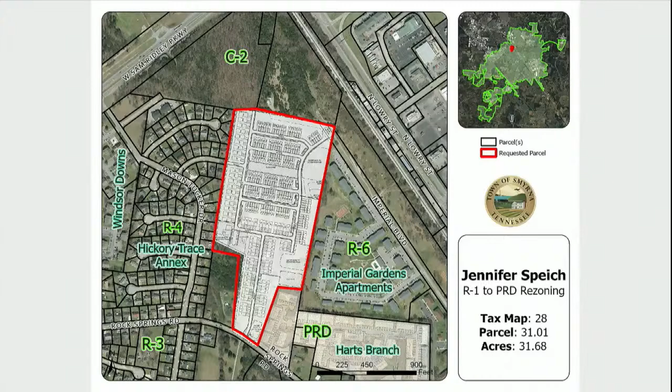Mr. Chairman, currently we're not planning on widening Rock Springs Road, mainly because Rock Springs Road runs into Front Street. So it's almost a traffic calming effect by not having the left turn lane, that will slow traffic on Rock Springs Road. It's kind of like the newest thing, keeping the roadway stacked, a road diet type thing, keeping it smaller. That way you do reduce the traffic speeds through there, because we've heard from other commission members about the speed on Rock Springs Road.

So leaving it 2-lane would help curtail speed on Rock Springs. Would that be your recommendation? My recommendation would be leave it 2-lane as is, since you're running into Front Street. Otherwise you're gonna have a higher speed volume of traffic running up into Rock Springs, into Front Street. Even with the growth taking place in that little area, you'd still recommend leaving it, not putting a turn lane in? Yes, sir.

Okay, anything else for Charles? I disagree. I think we're just buying ourselves mobility problems, and there are ways to control the speed of traffic. But to not have a series of left-hand turn lanes is just going to result in gridlock. It's a very busy street now, and this is going to add a significant number of cars to it. We're taking the recommendation of our engineer, of course, and I disagree. And like I said, we would not want to put any type of speed humps or anything along Rock Springs Road, because it is a major thoroughfare collector through there, or up Mason Tucker, just for emergency services personnel.

Okay, anything else for Charles? No. All right, thank you.

Number 8, there's some significant topographical changes on this property, so we would most likely have several critical lots. We would identify those at the preliminary plat stage if this is approved. That was really an informational comment more than anything for the developer.

We did ask for a traffic study. That has not been submitted at this time, but they are aware they have to do that, and any improvements recommended by that study would be required to be constructed by the developer.

Number 10, as it says 145 lots, we will have to have 2 entrances. They are proposing, per their phasing plan, to connect to that future section of Gwynne Farms as part of phase 1. As long as that happens, as well as the access to Cooks Lane, that would satisfy that requirement—before the 100th home is built in the development.

Sewer will not be available until it's extended through the adjacent Gwynne Farms development, so that's another factor in that road connection being built.

Number 12, they had some front setbacks on corner lots shown incorrectly. They've got it shown correctly now on their lot layout. I think there's some verbiage in there that still shows less, so they'll need to make that consistent.

It seems like it would benefit both sides because it would allow the section of Gwynne Farms to access Cooks Lane—another way in and out, which is why that stuff was there in the first place. It's changing the locations, but it was there to provide access to another way in and out besides Rock Springs Road and Lee Road. Gwynne Farms is a fairly large development, so yes, it takes some pressure off of both of those roads.

Gwynne Farms does have turn lanes, as I recall. On the Rock Springs Road side, yes, sir—they're actually constructing those already. I can't recall what was required on Lee. And there may have to be something done within Cook's Lane, because that's a hill. The traffic study is still to be submitted, but with the hill and the curve, that's certainly something we'll have to look at closely to take care of that curve there.

So the traffic study will contemplate the connection to Gwynne Farms? We'll have to include that, and certainly you've got a couple other stub streets. At this time, Gwynne Farms would be the only one that actually would be active, at least as far as we know. The traffic study concern is primarily going to be the access to Cook's Lane and what needs to be done there for safe access points and sight distance.

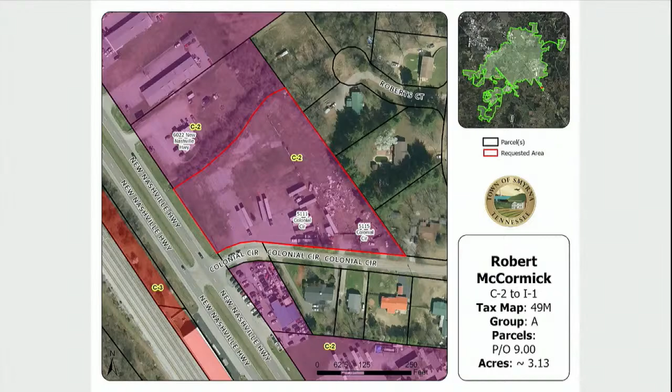I don't know what the answer to that is. I know codes have been out to visit him, so I don't know if that could be an issue they're dealing with as well. So if codes have been out to visit them, they know this use is not permitted, I'm sure. Yes, and that's why they've asked for the rezoning. So the motivation behind the request is to keep putting this stuff on the property. Yes.

When it's not permitted to be there as it is today. Correct. Make a motion to deny.

I have a motion to deny from Mark. Do I have a second? Second. Motion and a second. Further discussion.

All those in favor of denying this rezoning request signify by saying aye. Aye. Opposed? This rezoning request is denied.

Okay, we are now on to preliminary plats. Our first item is Gwynne Farms Phase 3, Robert Gwynne Drive, owner, developer, Lennar Homes of Tennessee LLC.

This is Phase 3 of Gwynne Farms. It's about 15.57 acres within this phase, 63 lots. This is kind of just the next phase of the overall development and is consistent with what was on their overall master plan.

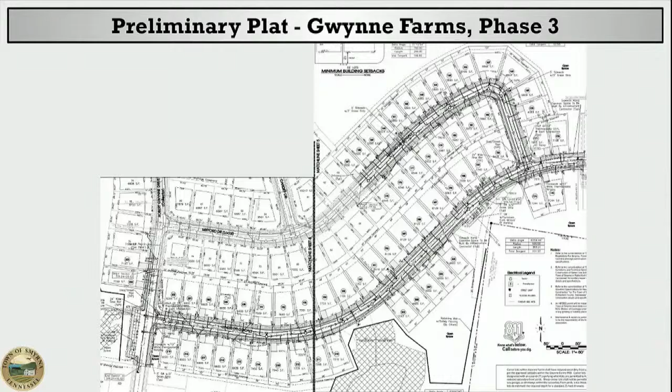Comment number 5, we did make a note just that Rock Springs Road is a collector, and those are improvements that are under construction there within Rock Springs Road as part of phase 1 and 2 of this development.

Comment number 6 was something I asked for, and again, that's kind of was the impetus, not just for the Cooks Lane development, for this future development of Gwynne Farms. Because they had shown their master plan within the plat on phases, sheets 3 and 4, wasn't consistent with what was approved, and so we did ask for that amendment.

Again, so they have done that. That doesn't affect this phase, that's only for future phases, but that has been submitted now.

Comment number 7, there was kind of this random 25-foot measurement on a couple of lots, and it didn't make sense, so they have removed that. It was something left over for something else that they needed to take off, so they took care of that. And then comment number 8,

there's some retaining wall, and they're showing some storm pipes within that area, so we'd ask them to relocate that to be away from those pipes.

Their response was there actually are some areas that they're actually designing within the retaining wall where the pipes would actually go through the retaining wall. I'm going to defer to Charles and to Tom on that as far as when they get to their grading permits and grading plans review. But that is what the engineer's response was to that comment.

Again, we had several comments, really 1 through 5 are standard comments that we still need to keep. Comment 6, it's 1,000 gallons per minute, 20 PSI is the required minimum fire flow.

We did add a note because we're aware that some of the lots in here might potentially be over the 3,600 square foot limit, which would, if that happens, require additional fire flow. We wanted to make sure they were aware of that.

Comment 7 was just regarding construction plans to be submitted to utilities. There is a retaining wall shown, and we'd ask for those details. It is actually going to be along one of the public streets, and so we want to be sure that's built correctly, because it's going to be holding up part of the street.

So that's something we're concerned about. Again, that'll come. That hasn't been submitted yet, but we do need those plans.

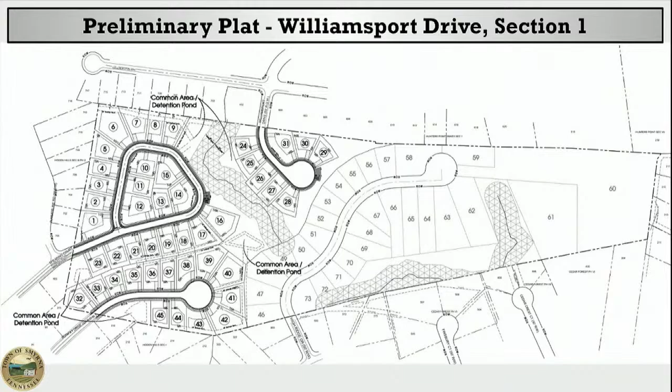Number 9, this is the subdivision where Williamsport Drive is stubbed into both sides, and it was approved to not be extended and connected. So one side, the east side, is where the new road name is proposed. They do have that name shown, but we do not have the 911 approval of that name yet. They will have to notify existing property owners there, since they're going to have new addresses because their road name is changing, so they'll have to go through that piece once they get their name approved.

We had several comments that have all been addressed. Comment number 10 regarding City of Murfreesboro details that were on there, we asked them to replace that, and they've done that.

Number 11, they only had one mail kiosk shown, and the post office typically wants that. However, in this situation, because the road's not connecting one side to the other, residents would have to drive all the way around St. Francis to get their mail. So we asked them to show one on both sides, and they have shown that now. Hopefully the post office will approve that.

Number 12 has been addressed with regards to the additional 5-foot setback required on lots that have easements on the sides, so we can remove that one. Comment 13 has been addressed with regards to the land set aside, some dimensions and area for the common areas. Comment 14 has been addressed with the roadway lighting plan submitted.

As you can see, it's really been a private haven for us as a family. My son has the 1 lot over there, he's going to be building what he calls his forever home. And our daughter, who started a business here in Smyrna about a year ago and lives out in the Nolensville area, wants to be closer to her mother now, and she wants to build her forever home on that lot.

When you say that lot, which one, do lot numbers so I can make sense of it. Can I point to it? Sure, yeah. It's lot 4, labeled as lot 4. Lot 4 is the daughter's, right here. My son, lot 1, mostly up in here, he's gonna build his house. And that's our barn and stuff. Of course, our house is over here.

And they didn't really want a cul-de-sac coming in here. That's the whole point of having this in the family. We are not gonna build out any other lots or anything. That's gonna be their little haven. We just want to keep that in the family, and we didn't want people driving up in there as a public street.

There's a gate there right now. Of course, the gate, you said the gate would have to come down? Well, I mean, I've kind of deferred to the fire department on that thinking. Typically, if we have a gate, the fire department has some sort of requirement that it can be opened automatically.

Right, that might be an option for them, something like that. Seems like, I don't know, I've been doing this a little while. You've been out there before. Well, I came out when you all were doing an event, we were thinking about turning that barn into an event center, a wedding venue, and that was just too much for us. Okay, I remember that now.

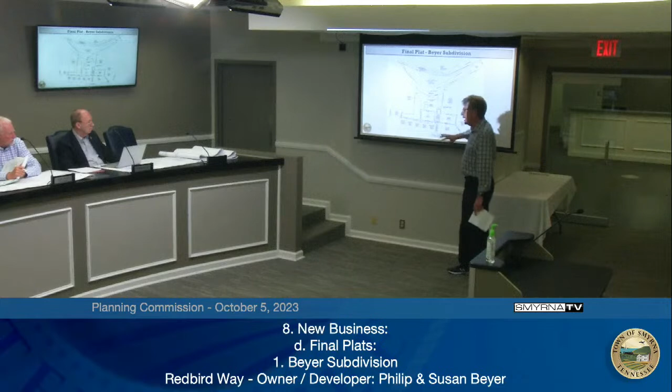I even offered them, if they wanted to keep it private, I offered to sell them this over here, since they're gonna be here. I said if y'all want to plant a garden or something, not guaranteeing nobody's gonna build, but now I see the variance, I see what would have to happen if I added lots, so there's no plan to add any more lots. We're gonna keep it private.

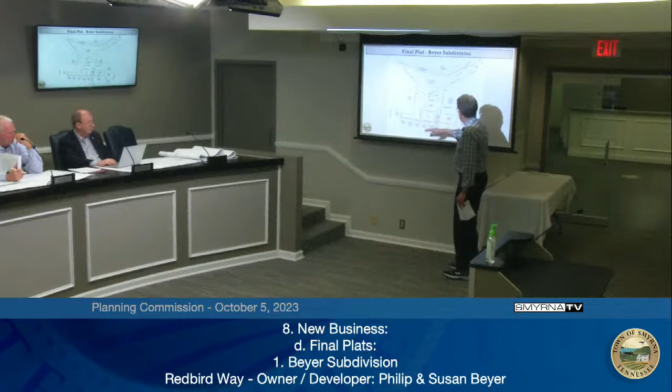They're gonna build nice homes, at least somewhere around 2,500 square feet, really nice stuff that's gonna fit really pretty into the neighborhood. Oh, one other thing too - this, you can't even see, there's a lot of vegetation here, you can't even see that. And over here there's a big wall here. It's just real private, if you've ever been out there, it's just real private.

I want to make sure I'm understanding what would happen if this remained an easement versus a road from a fire perspective. What would be required in that scenario?

Well, it would be similar to any private driveway. They'd have to provide, we'd have to be able to get access to it. We've got some situations in town where there's fairly long driveways and steep and whatnot that the fire department couldn't get to. This is not a situation here, it's fairly level and flat. We wouldn't have to worry about that here, but certainly they would have to have a surface that they could traverse and that sort of thing.

What type of surface would be required? Typically some sort of asphalt or concrete or whatever, I think is what they would prefer, certainly. And then you'd have to have, if it gets over 150 feet, they may have to have a turnaround. I don't know, try to check the distance on that, but they would have to have some sort of way within the site somehow for them to turn around, a hammerhead or a cul-de-sac or whatever.

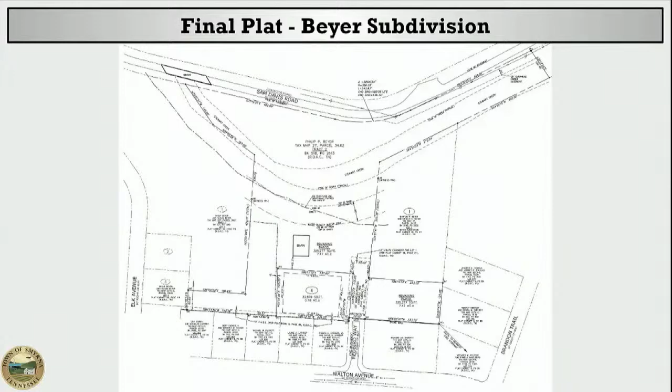Let me get to it so I can read it and make sure I get it correctly. There have to be some sort of legal documentation establishing that easement and the long-term maintenance agreement, kind of like an HOA, not necessarily an HOA, but a similar idea for the long-term maintenance of that easement, for really it's two tracts, two lots, but then the other remaining acreage that's there to have access to and maintenance of.

Kevin, I seem to recall something now on Rock Springs Road where we had a situation with two homes. I know we had discussion about one of the homes in the rear of their property either being sprinklered or moving a hydrant. That's over there behind Dollar General. Is this similar? Am I thinking of something?

That is a similar situation. They did have enough frontage, they had frontage on both lots on Rock Springs Road. So that was the difference there. Yeah, they were going to kind of share access with one single driveway, but they actually both had frontage on Rock Springs Road.

Now, the original plat for that had three lots, and that third lot was not going to have frontage on Rock Springs Road, so to speak, but that went away. It only ended up being the two lots.

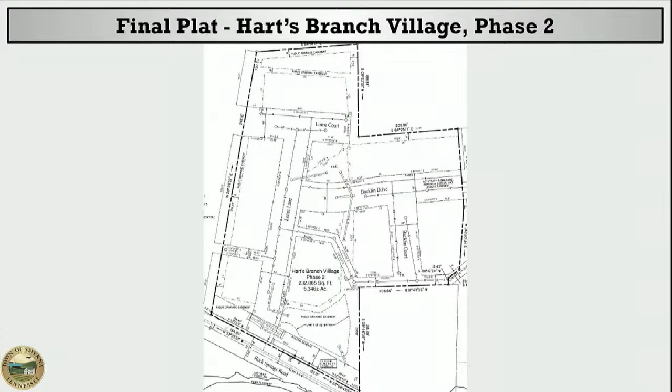Our last item under final plats is Harts Branch Village Phase 2, Rock Springs Road, owner developer Regent Homes, LLC. This is the final plat, just phase 2 of Harts Branch Village, about 5.35 acres. Again, same kind of minor comments we had on the previous plat regarding the thoroughfare plan, with right-of-way shown to be dedicated along Rock Springs Road, and again just add the owner signatures. This is consistent with the approved PRD and the site plan for this project.

Questions or comments? Move to approve, staff comments. I have a motion to approve with staff comments. Do I have a second? Second. Motion and a second. Further discussion? All those in favor of approving signify by saying aye. Aye. Opposed? This final plat is approved.

We are now on to site plans. Our first is Advanced Auto Parts, 1929 Almaville Road. Owner, developer, RAM Smyrna Partnership and JMB Investment Company.

Mitchell: Advanced Auto Parts is proposing a new retail facility in a multi-tenant building at 1929 Almaville Road. The total building square footage would be about 10,112 square feet, with the retail space occupying 6,912 square feet. The remaining square footage would be set aside for medical use.

A single access point is proposed off of Almaville Road, with a dedicated exit lane shown on the north side of the property. Currently the lots of proposed development are vacant and would need to be combined via a recorded final plat prior to issuance of any building permits.

Vehicle use area for the site is a little less than a half acre at 0.46, which requires about 2,025 square feet of landscaping, and they're showing 2,034 square feet. Parking required is 44 spaces, they're showing 45. That requires 2 handicap spaces, and they're showing 2 at this time.

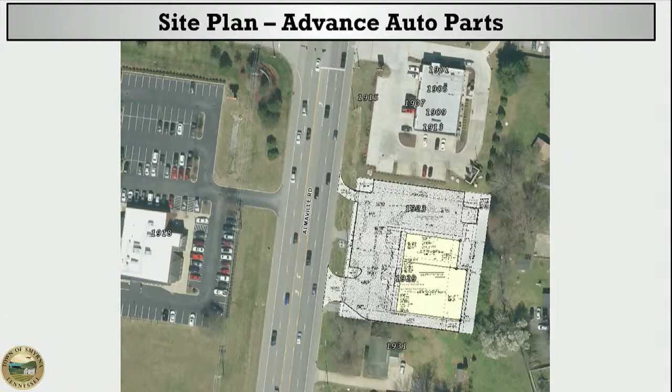How does an emergency exit only work? It would be bollards. So that fire could get in. It's my understanding with fire, it's getting out, that they don't have to back up all the way, so they would have time to remove the bollards to exit. It would not be for an emergency entrance.

Do we have a timeline or resolution of this? TDOT indicated that it may take some time for them to run it up further to their administration to see what they would accept. The developer has submitted approval that was on a state route in Knoxville for consideration, so that's what they're currently looking at. Okay.

Other questions for Charles or staff? What's the material on the privacy fence? I believe it was a vinyl privacy fence. I want to make a note of that in minutes, please. I don't want an old gray wood fence back there.

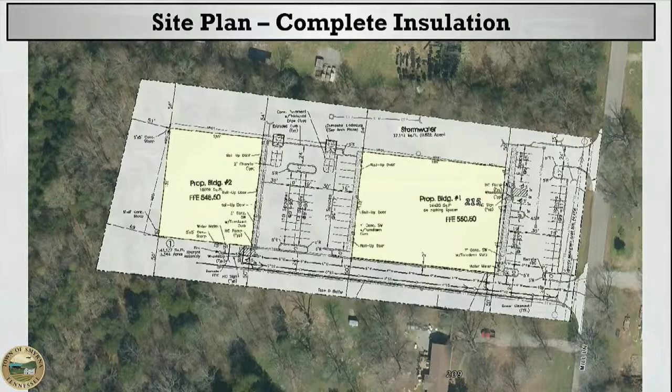Comment 12 regarding if the property is ever divided, the proper easements will need to be provided at that time, and if there is only one owner, the sewer can stay as designed. If there's ever more than one owner, the sewer services must be separated. More of an informational comment for the developer, but it should remain.

Comment number 13, we asked what is the pavement width, thickness, and condition of Mill Lane, and if it's ever been evaluated for the ability to carry truck traffic. The applicant has indicated that no study has been done, and it's just assumed Mill Lane can handle this traffic since other industrial trucks travel this roadway as well. This is a county road, so we want to make sure the developer gets with the county and verifies that this roadway can handle industrial traffic. So comment number 13 should be left outstanding.

Comments 14, 15, 16, and 17 are all CUD comments, and once again CUD has indicated that the site is not adequate for current fire flow requirements. So the developer will need to get with CUD to determine what should be done to meet adequate fire flow requirements, and they have indicated they are currently working with CUD at this time. So with that, staff recommend approval with those remaining comments above.

Let's clarify something for the commission, because I asked Kevin this a couple days ago. The zoning in our packet says it's C2, but in actuality it is currently zoned I3, is that correct?

Yeah, I circled it in the top left-hand corner. It is, yes, I3. So there's not a zoning change, this is appropriate. Correct. You've got some C2 around there, it's a bit of a mix of what's around that area, but current zoning is I3 and this fits I3 zoning, correct? Yep. Yeah, I was looking at that thinking this is not design review stuff right here. Okay.

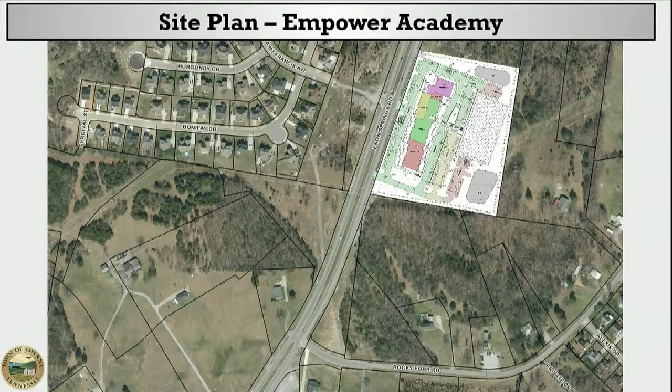Upon completion, the building would be 63,523 square feet, and the site is located within the Enon Springs Gateway Overlay District, conforming to the standards required there. Two access points are shown off of Enon Springs Road West for traffic flow around the site, with a playground and soccer field behind the school.

Vehicle use area for the site is 2.84 acres, requiring 12,400 square feet, and they're showing 12,500. Parking required is 253 spaces, which they're showing, including 7 required handicap spaces, which they're also showing.

The landscape plan shows street trees and shrubbery along Enon Springs Road West between the roadway and the parking lot. Within the Enon Springs Overlay District, oak is the preferred street tree species, shown along with maple trees. Shrubbery is shown along the foundation of the building on the sides and western elevations.

The ESO does require foundation plantings at the base of any elevations visible from a public street. A Type C landscape buffer is shown along the eastern and southeastern property lines due to adjacent tracts being zoned residential that abut this commercially zoned property.

There are several areas where the Type C landscape buffer should be located; however, due to overhead utility lines, no vegetation is shown in those spaces. A variety of trees and shrubs are also shown throughout the site and around parking areas and the building.

Architectural elevations were the main topic of discussion last month. The requirement is 35% window or void area on the facade's lower level surface area; as proposed, they're showing 37%, meeting that requirement. A minimum of 20% of the upper level must be window or void area, and they're showing 26%.